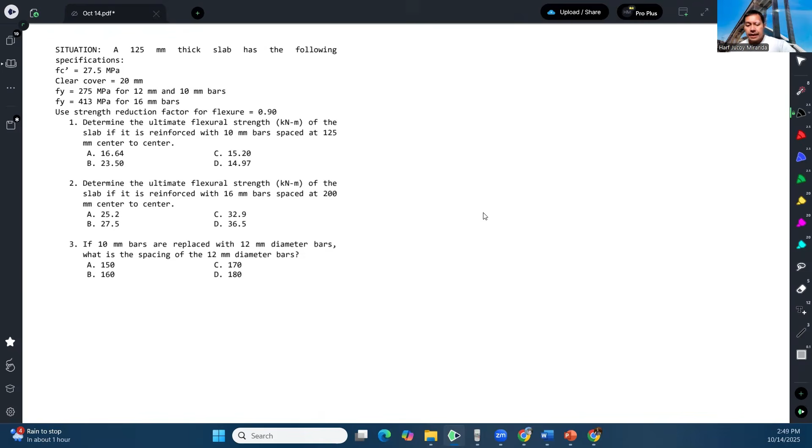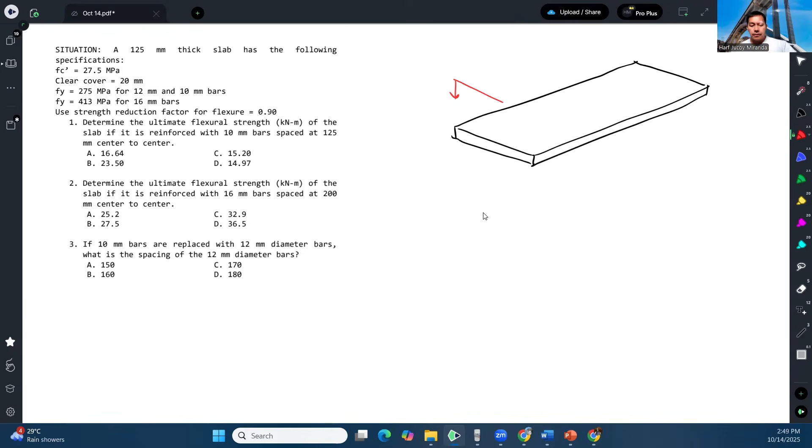For example, this is our slab, this is the long span, this is the short span. Okay? The idea here is once we load this with floor load, there's floor load here. So the possible scenario is, if this is the long span and this is the short span, it's considered one-way slab when S over L is less than or equal to 0.5.

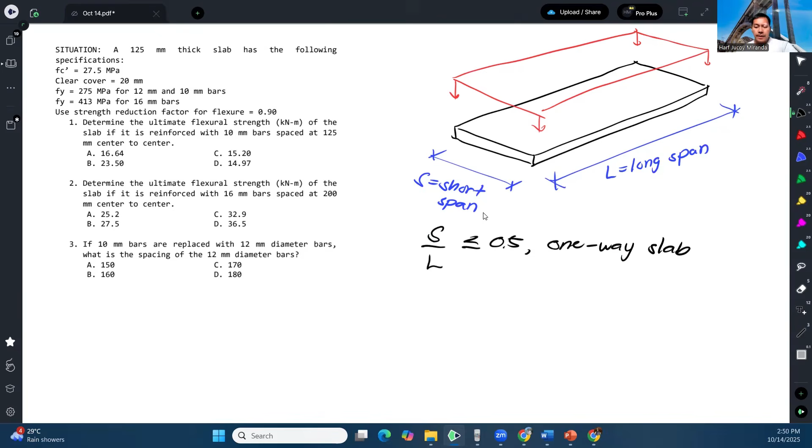And what's special about one-way slab is that when it bends, it only bends along the short direction. So it bends like this, in that direction.

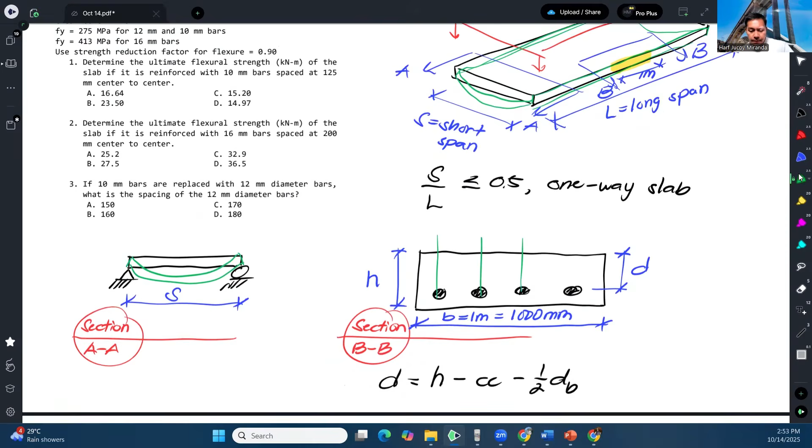Alright? Now, what is called spacing - this is the center-to-center spacing of the flexure bars. And we can compute that spacing by dividing this number of bars into 1,000.

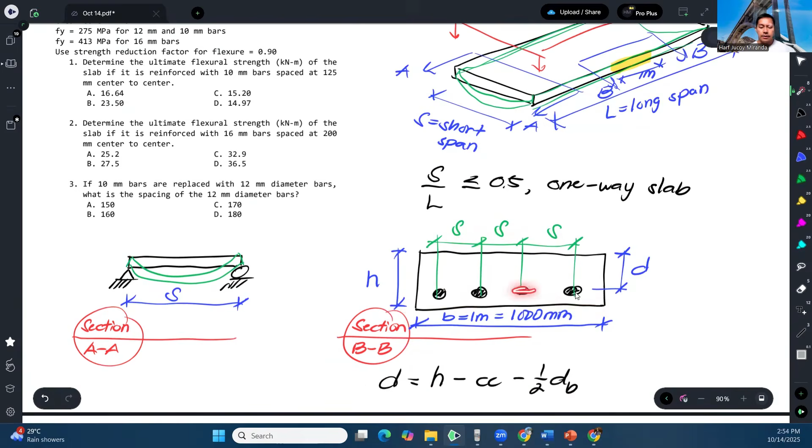So the spacing is 1,000 divided by number of bars. So in short, if we want the number of bars, that is just 1,000 over spacing.

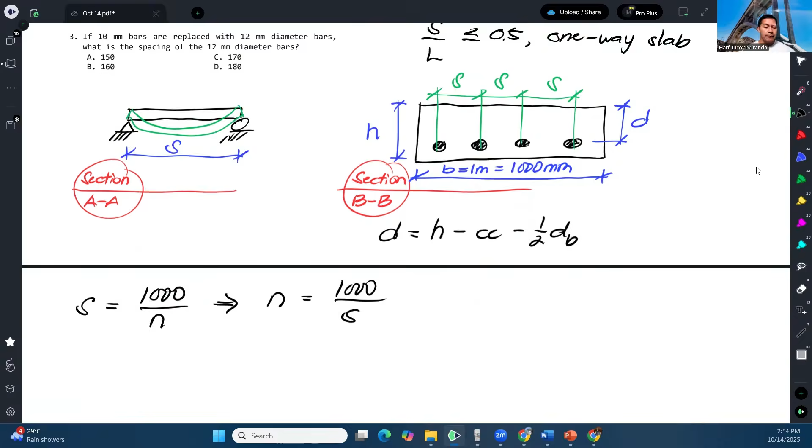So for number one, it says: determine the ultimate flexural strength of the slab if it is reinforced with 10 mm bars spaced at 125 mm center to center. So our bar diameter is 10. The spacing given is 125 mm. So for number one, we can define how many bars - that's 1,000 over the spacing of 125. That gives us 8. So we have exactly 8 bars per 1,000 or per 1 meter width.

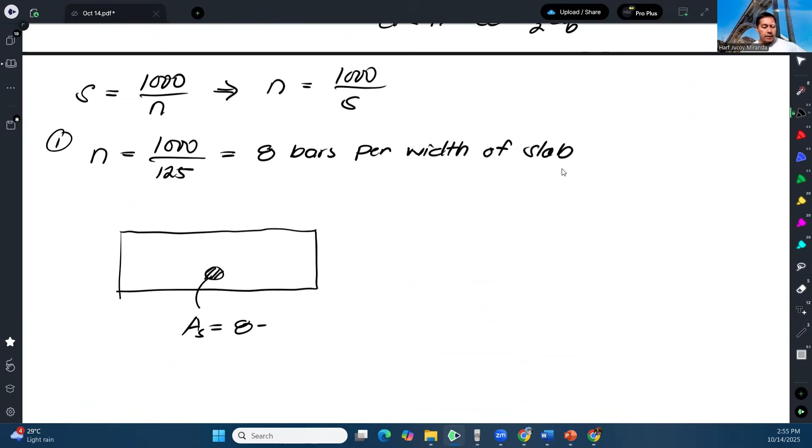Let's say this is our AS. So our AS is 8 bars, 10 mm diameter. Then here we have 1,000.

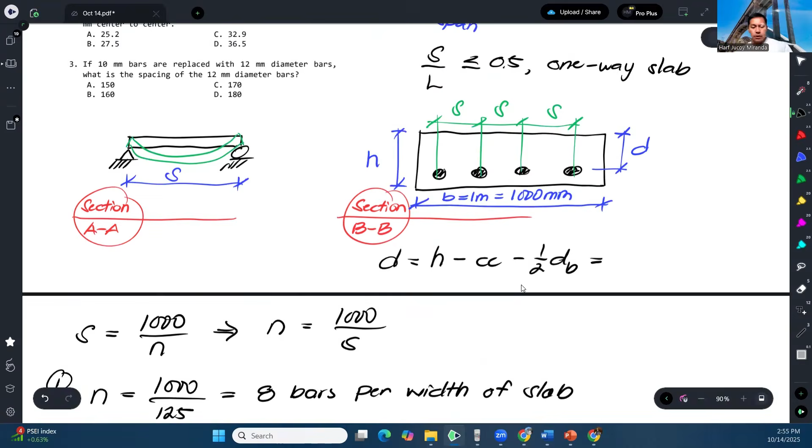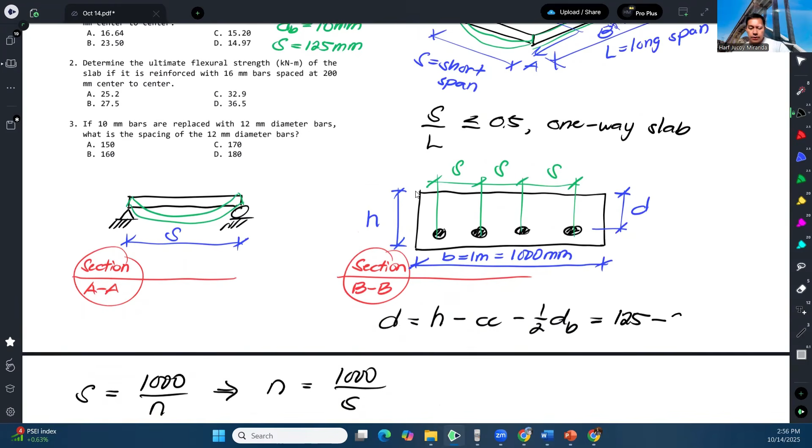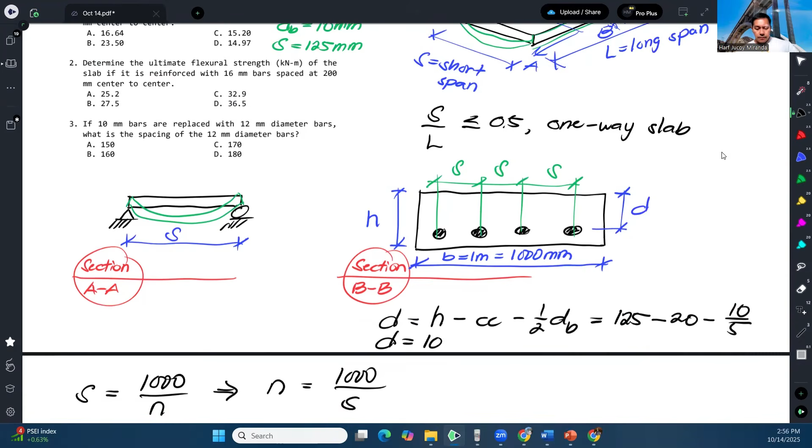Then here is the effective depth. Let's compute the effective depth. The overall thickness is 125, the clear cover is 20, and the diameter of bar number 1 is 10. So that's 125 minus 20 minus half of 10, which gives us an effective depth equal to 100. So our effective depth here is 100.

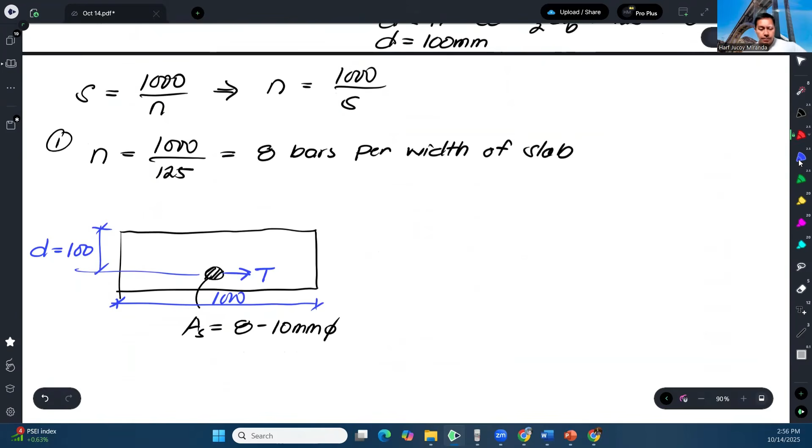Okay, so to investigate this, again this is tension, and somewhere here is compression. So we have here the depth of the compression block. To compute that, we will apply C equals T since this is investigation.

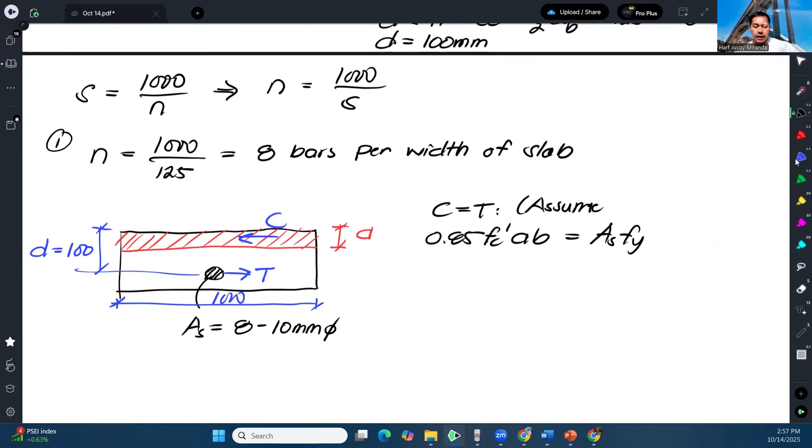So C equals T, that's 0.85 Fc prime AB equals AS Fy. Here, we assume again that the tension steel will yield. So we have 0.85, Fc prime given is 27.5, times A.

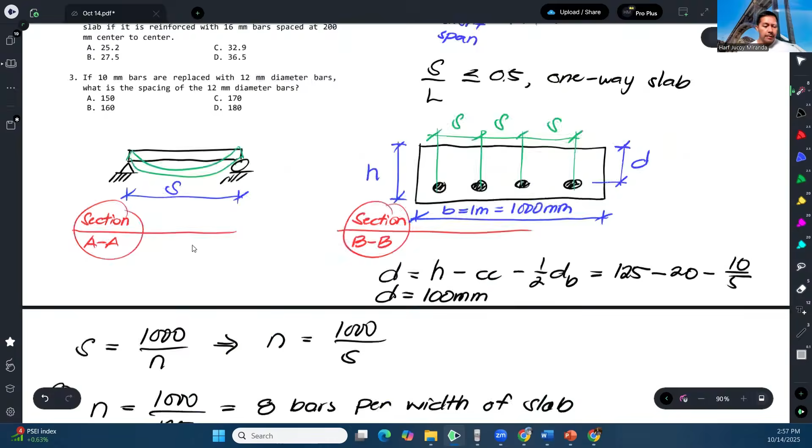Then our B is 1,000, equals AS. Our AS is 8 times pi over 4 times 10 squared. And then for Fy, we have to be careful here, because since 10 mm bars are used, the problem says Fy is 275.

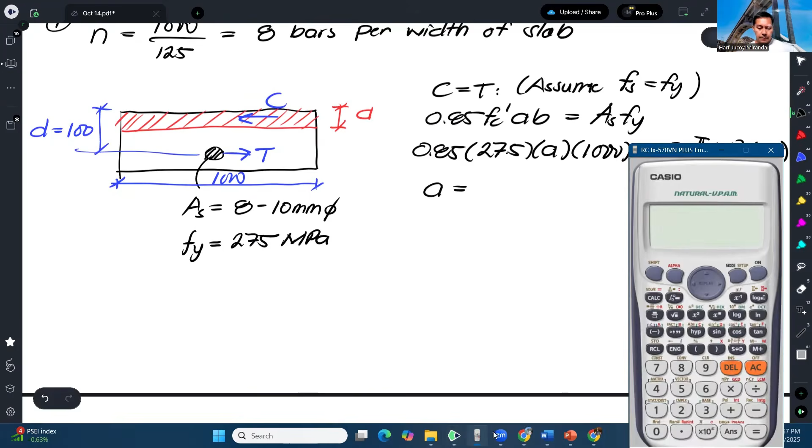So let's solve for A: 8 pi over 4 times 10 squared, times 275, over 0.85 Fc prime times B. So that gives us A equals 7.39 mm.

So we can check here if our assumption that the steel yields is correct. Let's get C equals A over beta 1. Our beta 1 is 0.85. So that gives us 8.7.

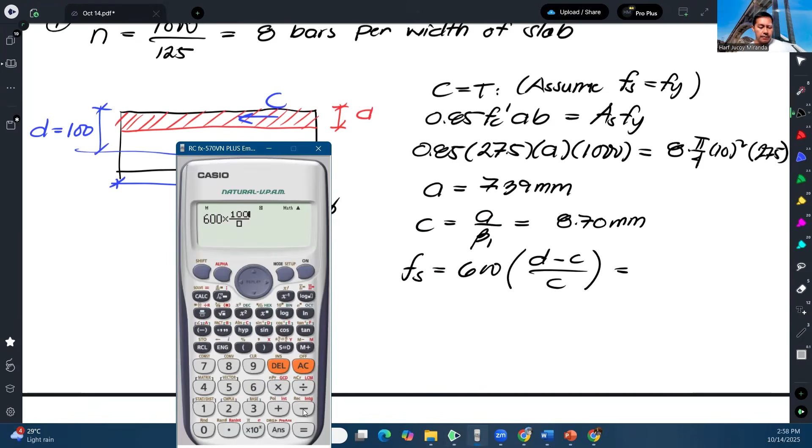And then the actual steel stress is 600 times D minus C over C, that's 600 times 100 minus C over C. So that's quite large, 6,300 megapascal.

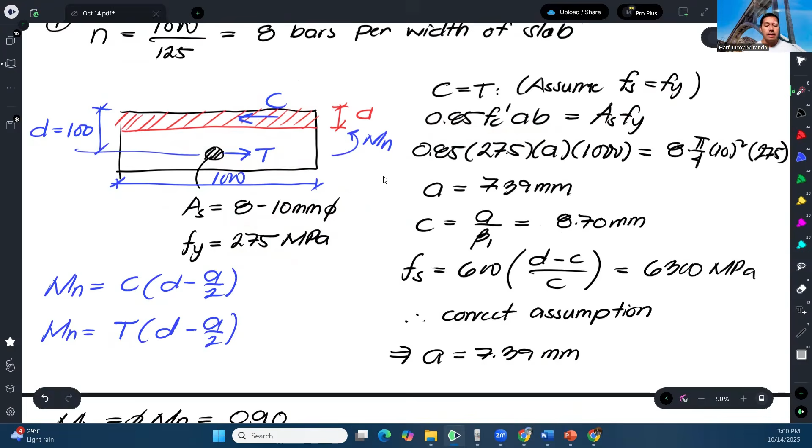This is just the area times Fy. If we used C instead, we'd use 0.85 Fc prime AB. So I will just use T: AS Fy times D minus A over 2. The answer will be the same either way, guys.

So 8 pi over 4 times 10 squared, times Fy which is 275, times D which is 100 minus A over 2. That's it. And once again, this will be in Newton-millimeter: 0.9 times 8 times pi over 4 times 10 squared times 275 times 100 minus 7.39 over 2.

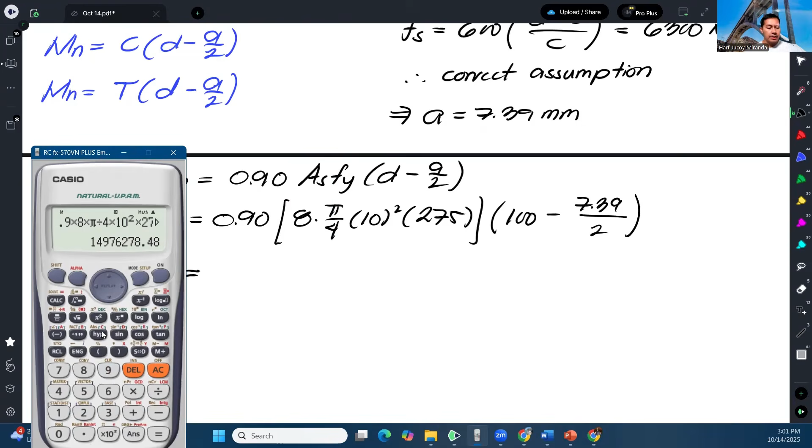So that is in Newton-millimeter. To convert to kilo Newton-meter, just divide by 1 million. So that's 14.976 kilo Newton-meter. That will be our design strength.

So our answer for the first question is letter D.

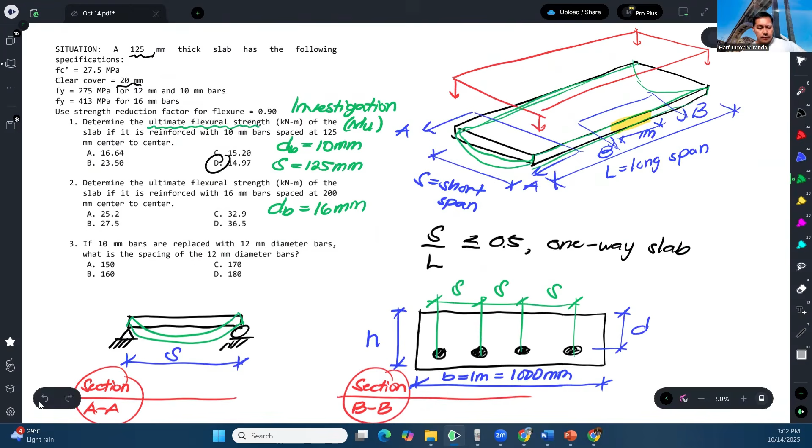Next, number 2: determine the ultimate flexural strength of the slab if it is reinforced with 16 mm bars spaced at 200 mm center to center. Actually this just repeats number 1, but this time our bar diameter is 16, with spacing of 200. So we will just repeat exactly what we did.

So for number 2, first let's get the number of bars: 1,000 over spacing, that's 1,000 over 200, which gives us 5 bars. So we can already compute for AS: our AS is 5 times pi over 4 times 16 squared.

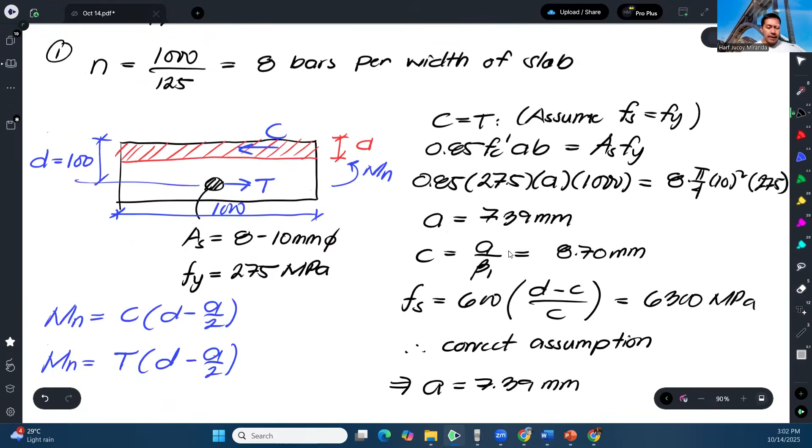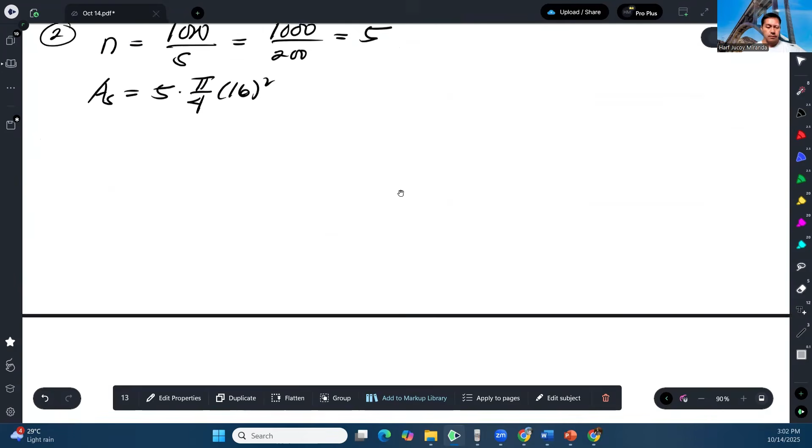So ito lang ulit 'yan. Yun nga lang, hindi na to 275, hindi na rin to 8, tsaka hindi na rin to 10. Okay? And also, magbabago yung effective depth kasi iba na yung diameter eh. So ito ay 16 mm. Tapos dahil 16 mm yung gamit, sabi sa problem, 413 megapascal daw kapag 16 mm diameter. Okay? And then, what else?

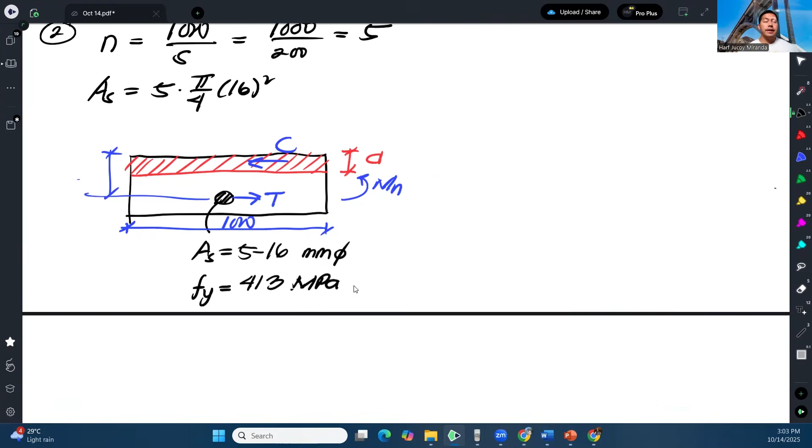Yung effective depth. So effective depth natin, okay, will become 125 minus concrete cover minus half nung bar diameter. So, 16 na kasi yung bar diameter, kaya magbabago na to. So, that's 97. Ayan, so 97 mm na effective din.

Okay, so again, to investigate the nominal capacity, we will start off with C equals T and then we will solve for A. Okay, so again, assume tension steel yields. So we have 0.85 FC prime A B equals AS, 5 pi/4 times 16 squared, and then FY is 413. And then we will just solve for A.

Okay? So solving for A. Yun na yun, ayan okay na. So, okay, so solving for A, we have 5 pi/4 times 16 squared times 413 over 0.85 FC prime B. So that's 17.76.

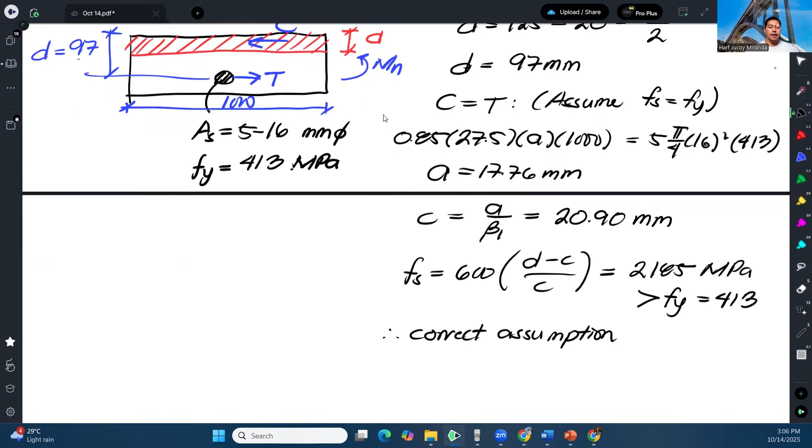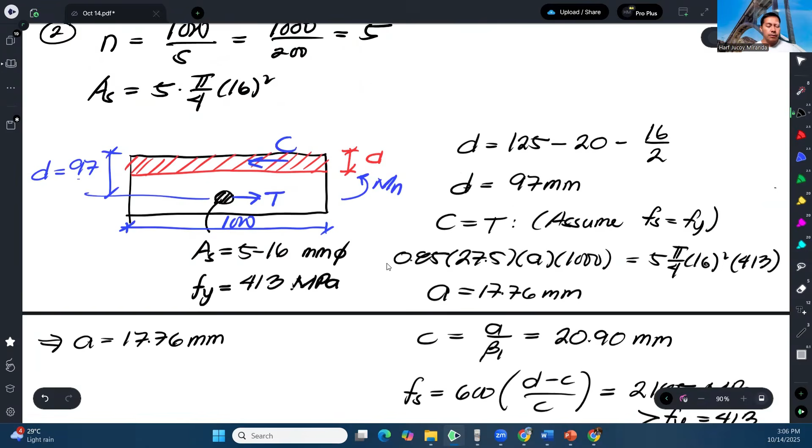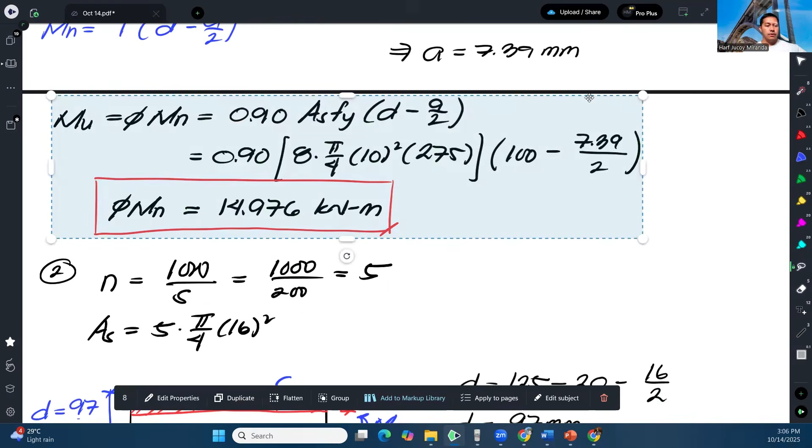Okay? So therefore, i-adapt natin yung A na 17.76 millimeters. Alright, and from here, pwede na natin makompute yung ultimate moment capacity. So basically, ulitin lang natin to, no? Ayan din yun, babaguhin lang natin yung mga values. Ayan, so magiging 5. Ito magiging 16. Ito magiging 413 FY. Tapos itong effective depth magiging 97. Tapos yung A magiging 17.76. Okay, and then of course nagbabago to.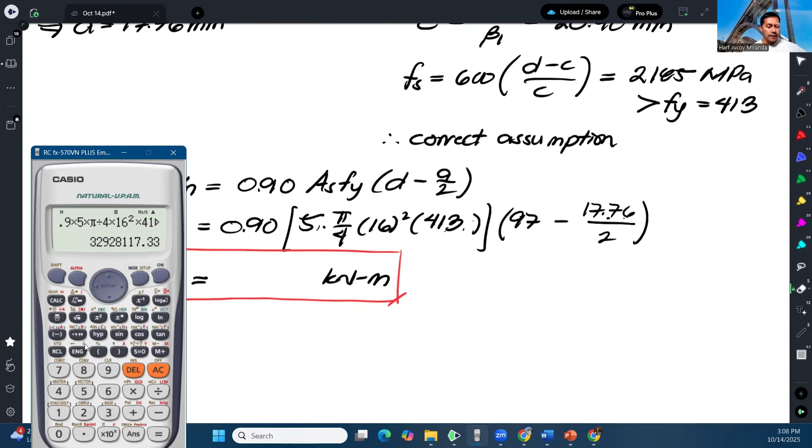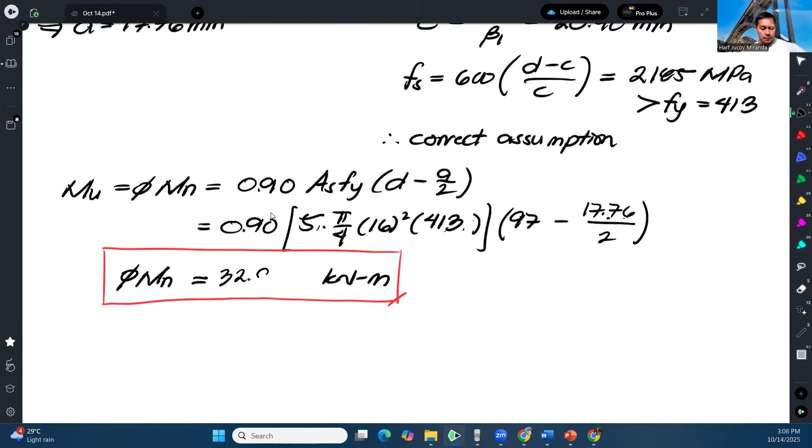Okay, so that gives us, kapag dinivide sa 1 million, 32.93 kilonewton meters. Okay? And that would be our answer for number 2. So letter C. All right, so lastly, for this item, number 3, if 10 bars are replaced with 12 diameter bars, what is

the required spacing of the 12 bars? So papalitan daw, halimbawa daw, gumamit ka ng umpisa ng 10. So ngayon, pinalitan mo ng 12. So ano daw yung magiging required spacing? Okay? So actually, itong number 3, mayroon siyang connection dito sa number 1. Ito, yan, may connection siya sa number 1. So parang yung tinutukoy niya dyan na 10 ito yung criteria. Ito yung diameter, ito yung spacing. No? So parang tinatanong sa atin, paano kung gagawin kong 12 to? Ano yung magiging required na spacing na tong 12 bars?

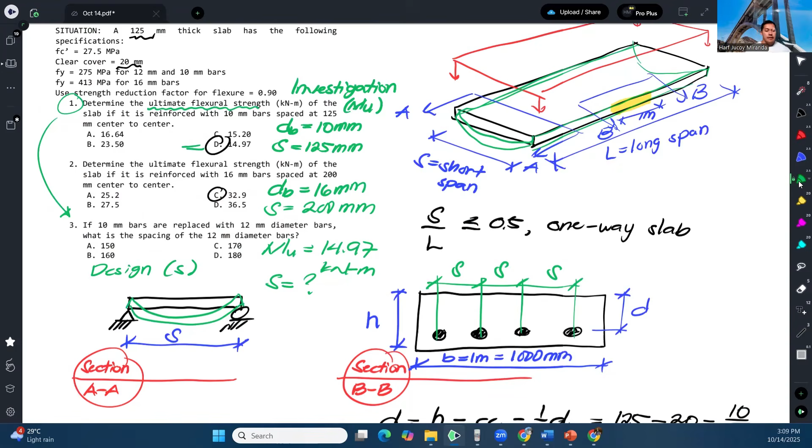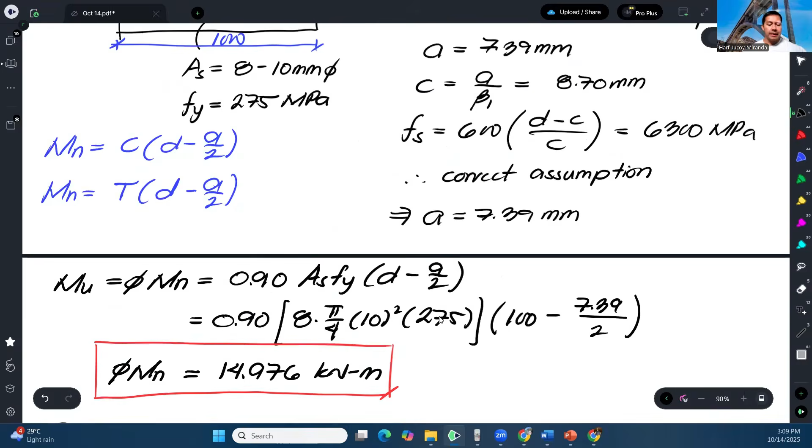So ibig sabihin, para ma-connect natin silang dalawa, kailangan, yung tinutukoy niya sa number D, kailangan yung capacity nitong number 1 ay maging same lang yung capacity dito kahit napalitan mo siya ng diameter. So, ibig sabihin dito, isi-set natin na yung MU natin ay equal din dito sa sagot natin, which is 14.97. Okay, tapos pinapahanap yung spacing. Okay? So, in short, etong number 3 is actually a design problem, no, kasi hinahanap natin ay spacing. Alright? So, for number 3, we will adapt MU from number 2, I mean from number 1, which was 14.976.

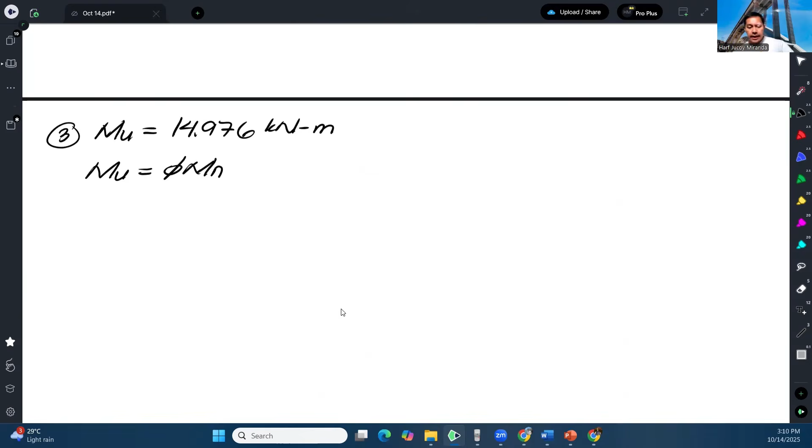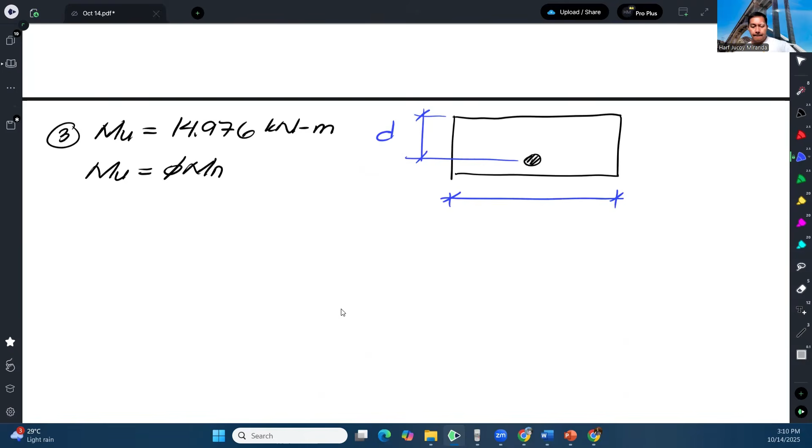And since we are designing, we will equate MU to phi MN. Okay, so again, ito yung cross-section natin. So meron ditong effective depth. Tapos ito ay 1,000. And then ito, yung AS natin is consist of, hindi natin alam yung number, no? Pero yung diameter ng bar na gagamitin ay 12. So, ibig sabihin yung FY niyan, 275 according to the problem. Okay? So, meron ulit tayo ditong depth of compression block, that is A. Okay? And then, ito yung compression, ito yung tension.

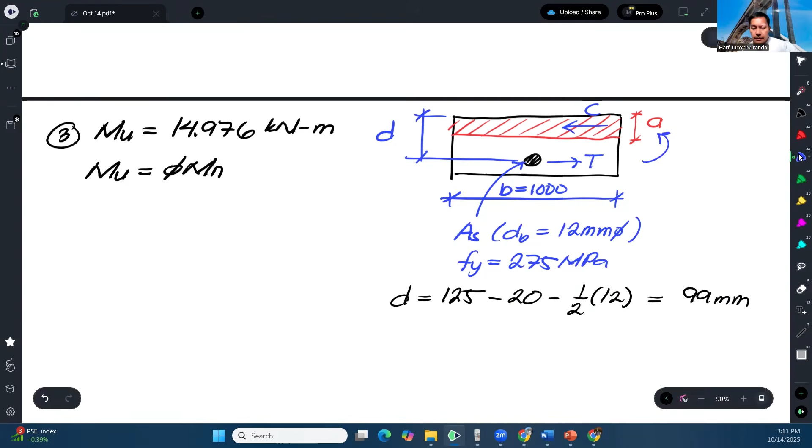So, now, we need to first find kung ano yung effective depth, kasi nagbago na naman tayo ng bar diameter. So, effective depth is 125 overall depth minus concrete cover minus 1/2 ng 12. And that's gonna give us, I believe, 99 millimeters. Okay, so that yung MN natin will be equal to C times D minus A over 2.

Okay, that is T times D minus A over 2. So this is the formula when we take moment here, this is the rotation. Their distance is D minus A over 2.

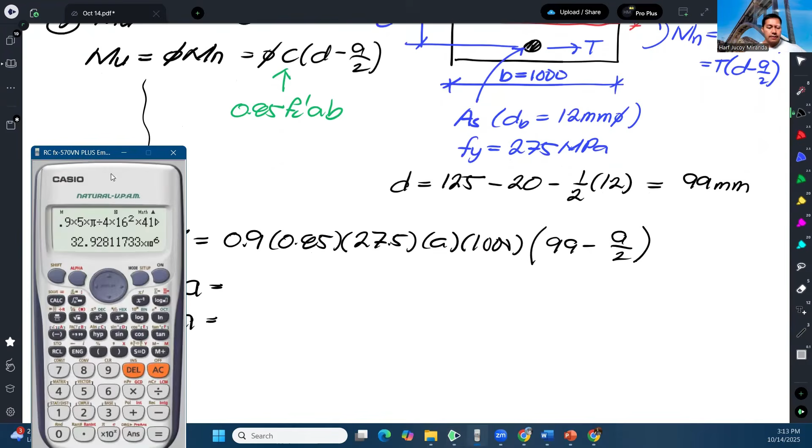I'll use phi CD minus A over 2, then this, 0.85 FC prime A. So now we will have 14.976 million equals phi 0.9, and then 0.85 FC prime is 27.5 A, B, then D minus A over 2. So solving for A, again I'll use the quadratic formula that I usually use. So 0.5 negative of effective depth, then this is the moment, divided by phi 0.85 FC prime B.

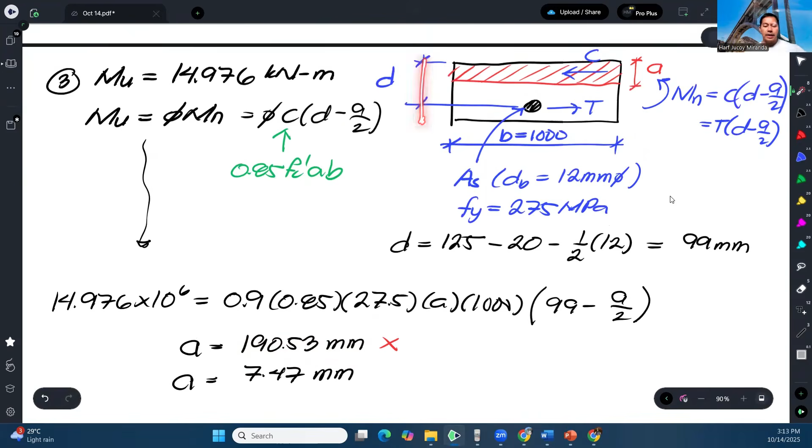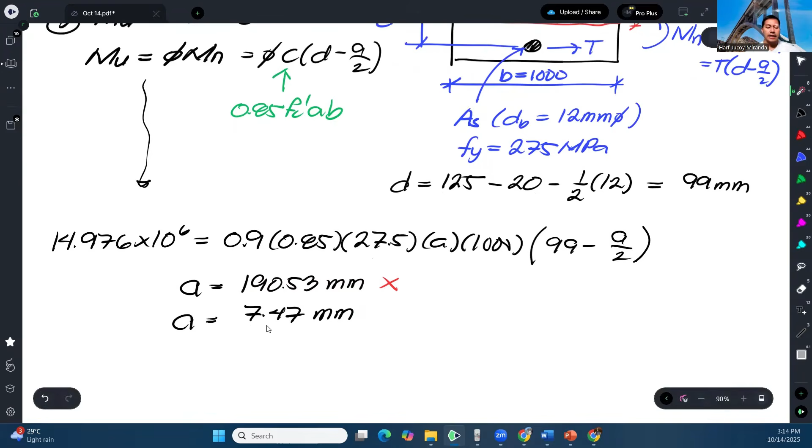So for beams, we just need to check A against A max to know if it's singly or doubly reinforced design. For slabs, we can also compare it to A max to know if the depth provided is adequate. But since this is a board exam problem, the depth given is already fixed, so we can't change it. So we will just use it as is for A. Anyway, the A value is small, so we're sure it's enough.

So now that we have A, the question is asking for AS. So the next thing we'll do is set C equals T. So 0.85 FC prime AB is equal to AS FY. Since we're designing, FY is automatic. So let's plug in the values. FC prime is 27.5, the A we computed is 7.47, B is 1,000, and AS FY, this is 275.

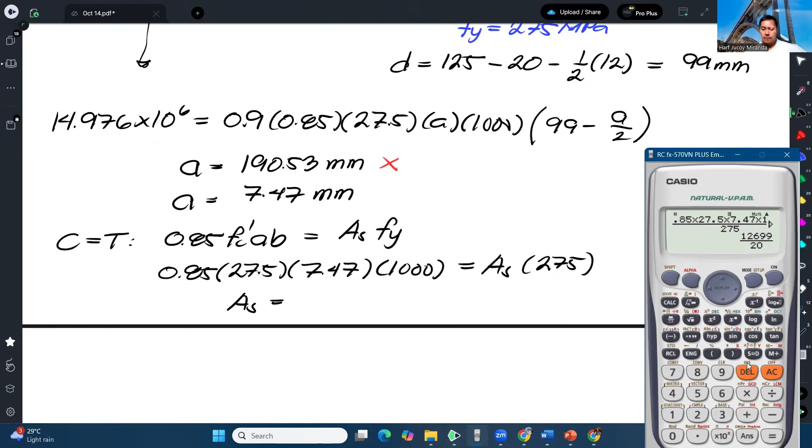So our AS would be 634.95.

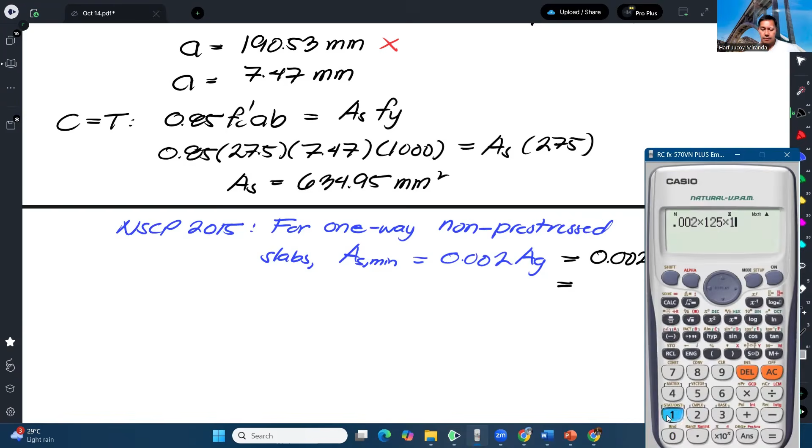Okay, normally we check this against the minimum. The minimum for one-way non-pre-stressed slabs, the minimum steel area is 0.002 times the gross area. When we compute that here, that's just 0.002 times the gross area, which is 1,000 width times 125 overall depth, giving us 250 mm squared.

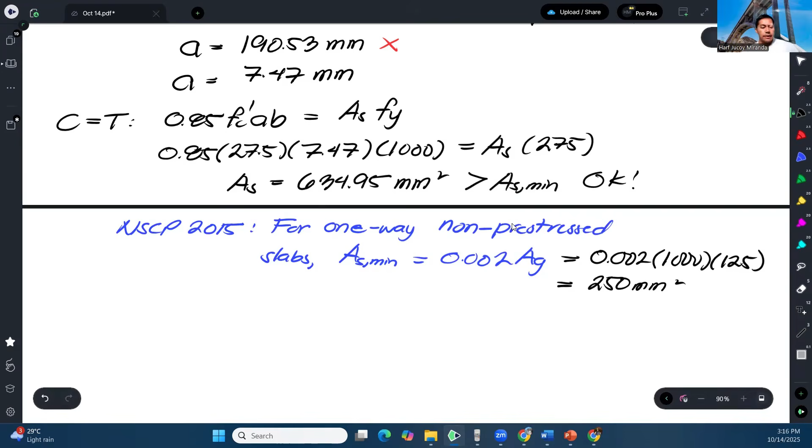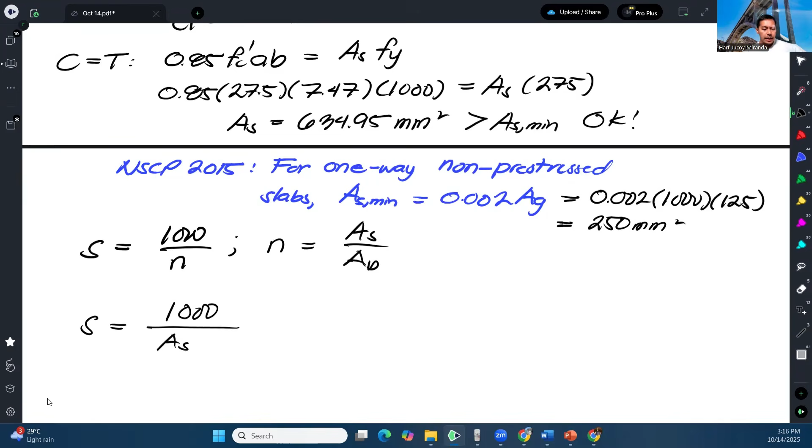Now let's define the spacing. As I said earlier, spacing is 1,000 divided by the number of bars, but I don't know the number of bars. So the number of bars is computed by dividing AS by the area of a bar. That means we can also say that the spacing is 1,000 divided by AS over area of the bar. So to compute the spacing, we have 1,000 over AS which we computed as 634.95, divided by the area of one bar.

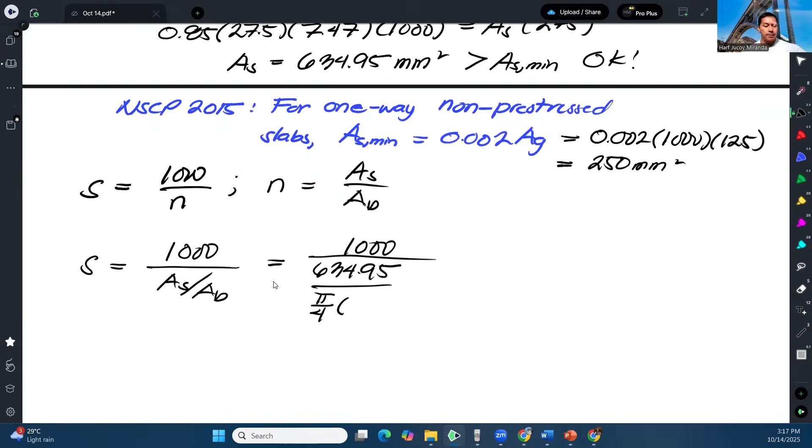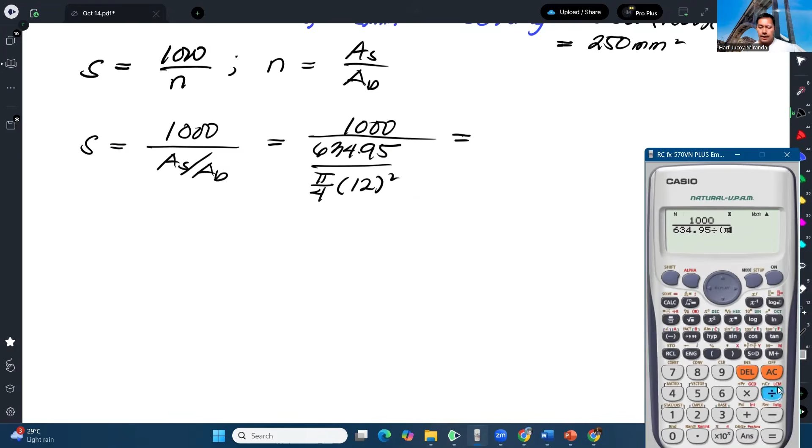So what did we use here? 12mm. So the required spacing is 1,000 over 634.95 over pi over 4 times 12 squared. Okay, that's 178.12 mm.

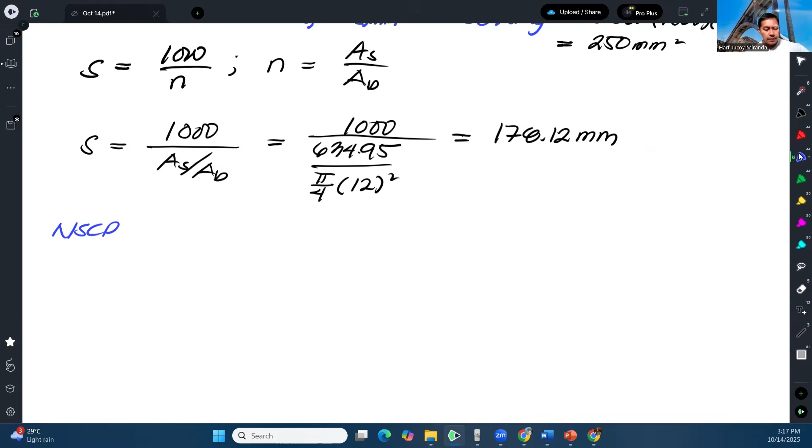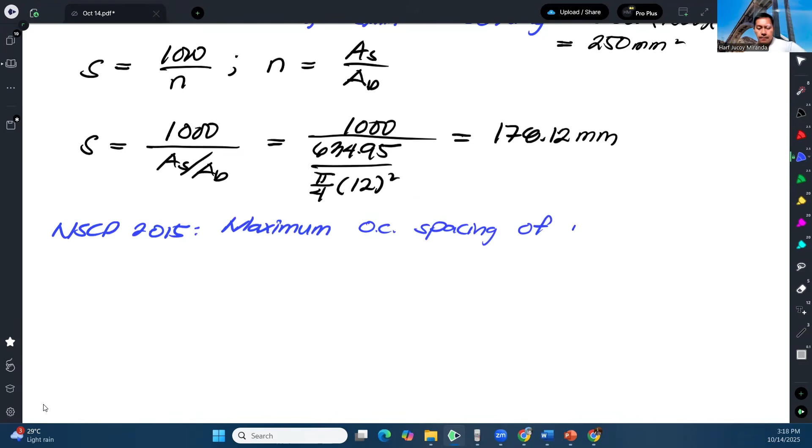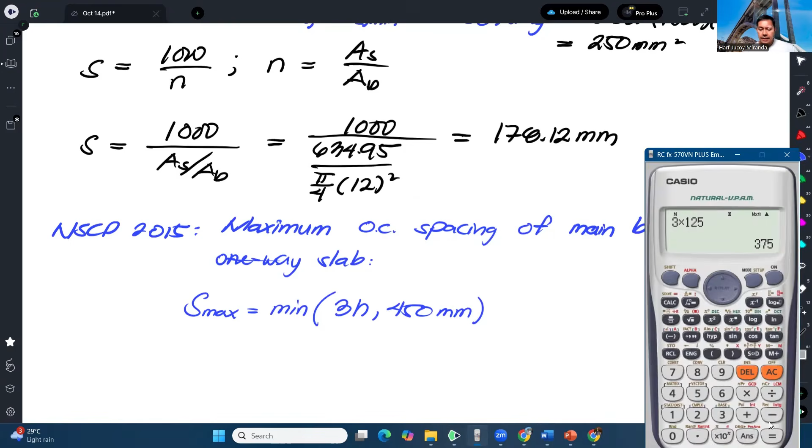Now before we adopt that, again per NSCP 2015, there's also a maximum center to center spacing of main flexure bars of one-way slabs. That is whichever is smaller between 3H and 450. For this problem, our H is 125, so 3 times 125 gives us 375. That means the smaller value governs, so 375 is the maximum permissible spacing. Since what we got is lower than the maximum, it's okay.

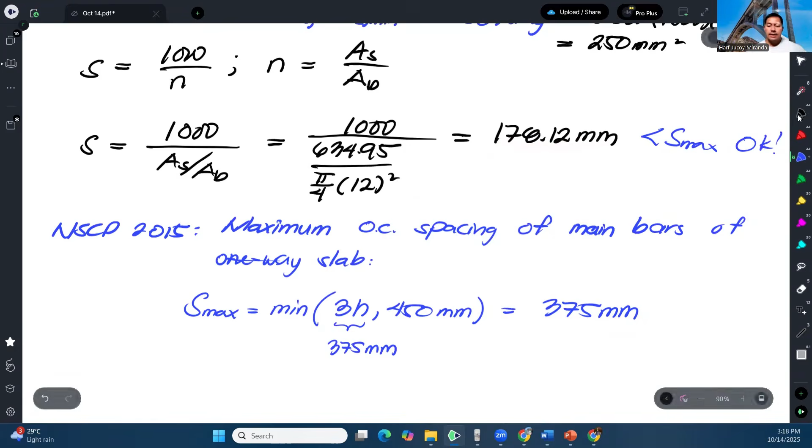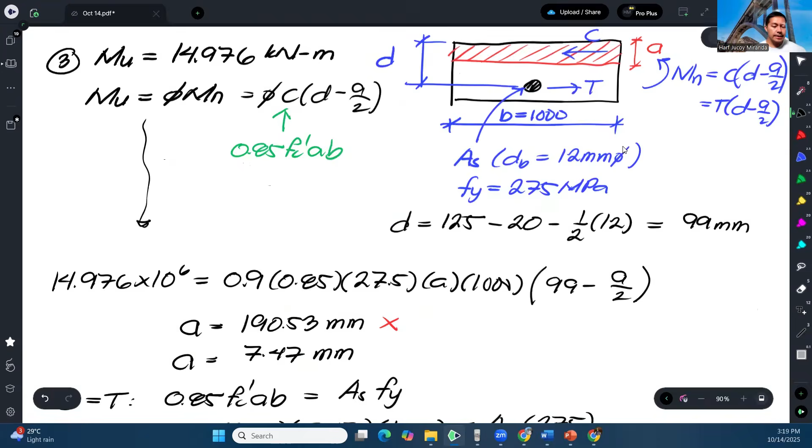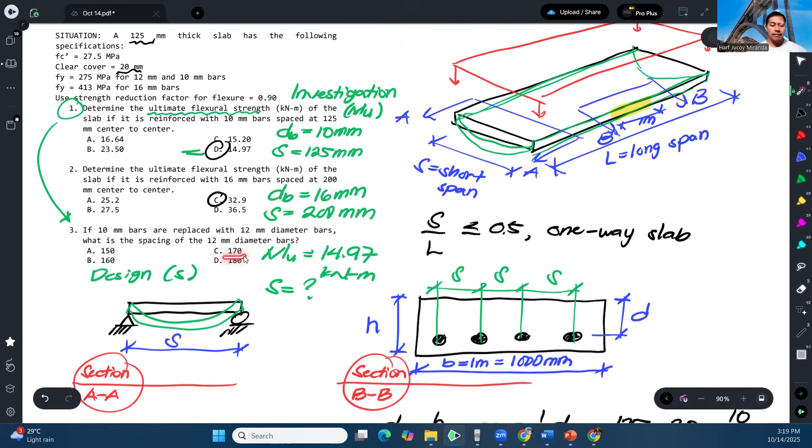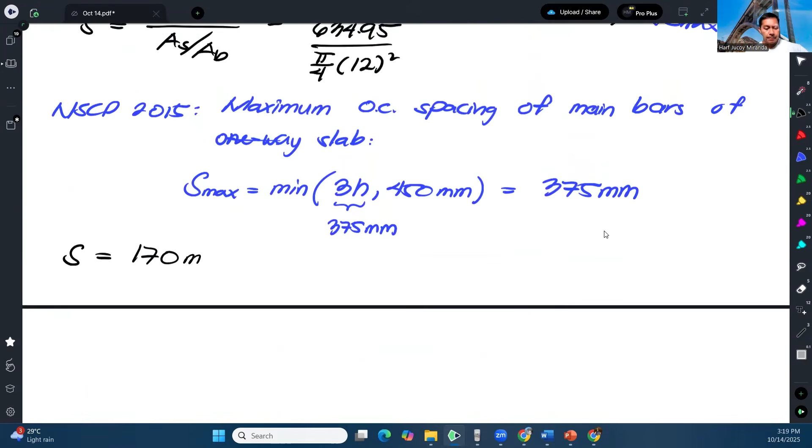So therefore, the spacing we adopt—take note, for spacing we round down, not round up. So rounding down, let's check the choices; any smaller value works. In this item, the best answer would be letter C, not 180, since it's not rounded up. Because once you round up the spacing, what happens is your steel area decreases, since you're spacing the bars farther apart. So we should choose the next lower value for spacing. In this problem, we choose letter C, so we can just say use 170 mm.

And that would be our answer. And that's how we solve this problem.